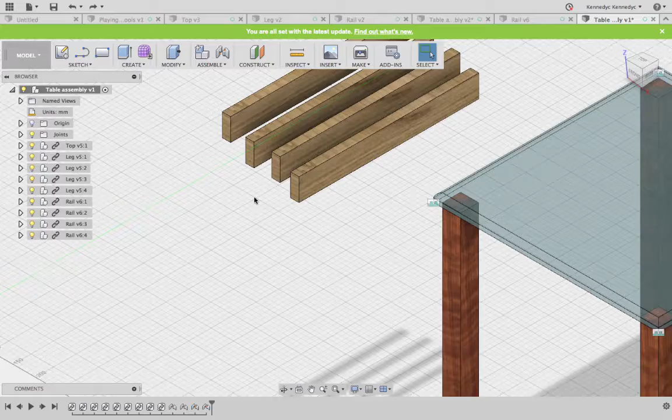The final thing we need to do to complete this project is to join these rails. We do that in a similar way to how we joined the legs to the top. This time we're joining the rails to the legs.

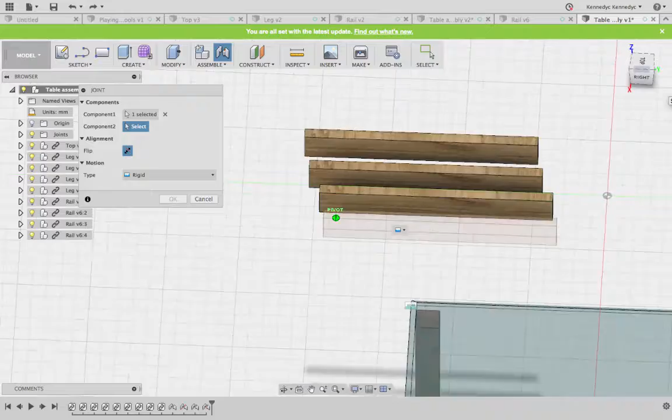Zoom in so that you can get nice and accurate on these faces. Hit J for joint, select the first component that you'd like to join, click, and this one's going to go onto the inside of this leg here. So we're going to spin that around, zoom in underneath, and select that face there. Check your views. It's looking in the center, so we can hit OK.

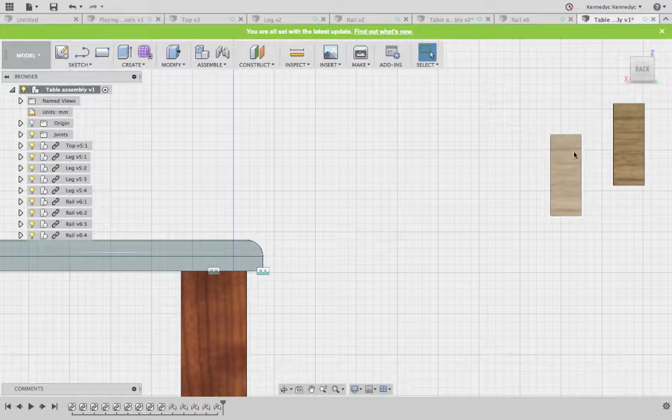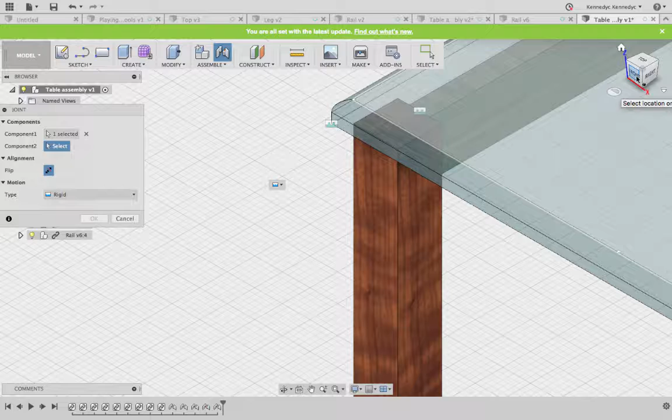Next one is this one here. You can hit J for joint. Select that point there, and zooming in and underneath, you should be able to select that point there, and that should swing around without having to pivot it at all.

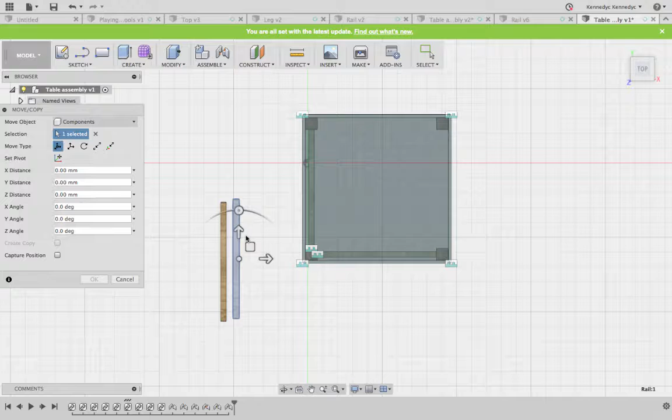If we weren't able to do that, you could actually click modify, move or copy, select components, so we need to change bodies to components there, choose the component you'd like to select, and we might change around to that top view, and we're going to move that 90 degrees, click OK, and that way it's aligned correctly so that when we come and join that, it fits.

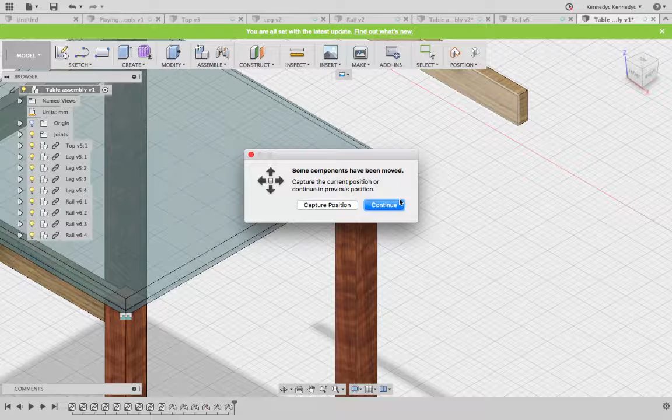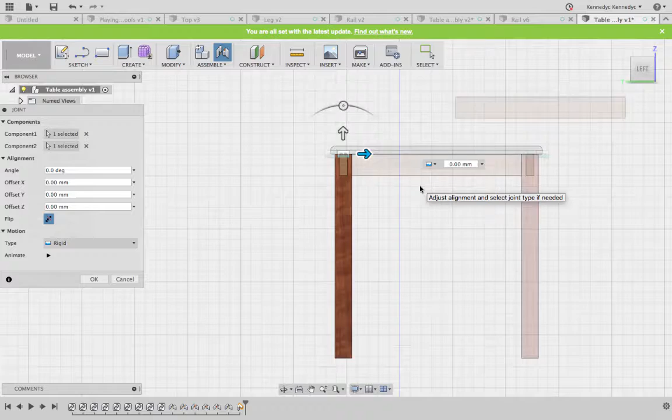However, as I said, we don't need to do that in this case, so long as we zoom in nice and clearly, J for joint, select the correct point and align that underneath. It should do the swinging for us and put that into position. It's always a good idea to check that that's fallen in the center and it's level there. Make sure that there's nothing in your offset boxes before we hit OK.

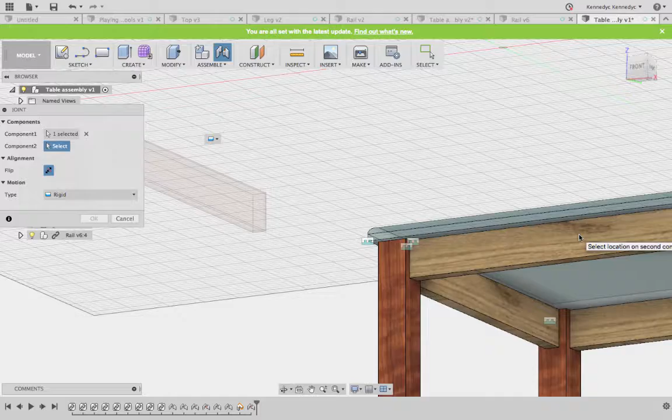And then the final one, J for joint, component 1, zooming in to select component number 2.

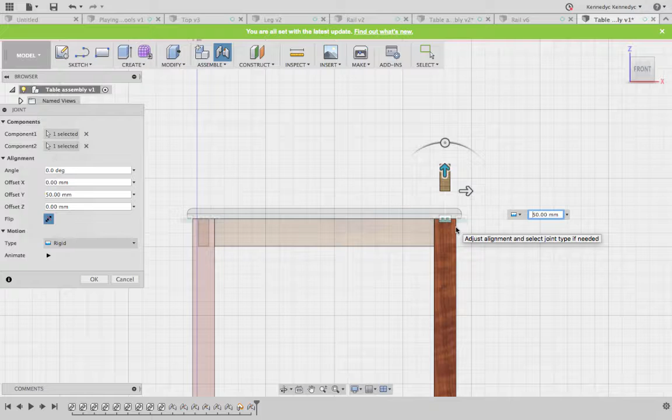Okay, this time our offsets are a little bit out. I'm going to make sure that we click the arrow there. I must have selected the wrong point, so the height of that is 50 millimeters, so we're going to go 50 in the negative, and that looks like it's back on track, so we click OK, back to home, and we can see our table's complete.